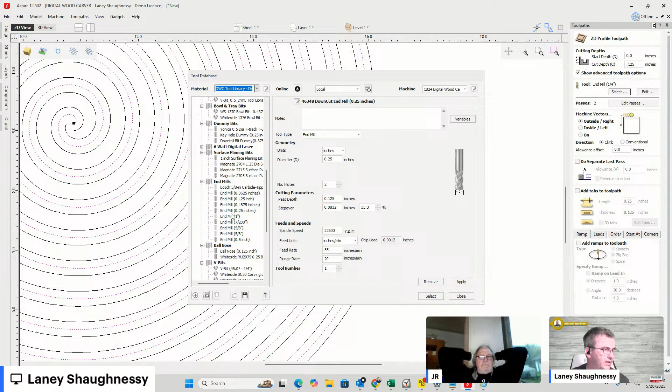Let's go 1/8 of an inch with a 1/4 inch end mill. Let me select my 1/4 inch end mill, the generic one from the new download I just did. So, 1/4 inch end mill on the line. Calculate. Preview the visible tool path.

Hold on, do you want to do a side view? You want me to cut it in half so you can see the side view? Yeah, right, hold on a second. Let me do this. Bear with me, hold on a minute.

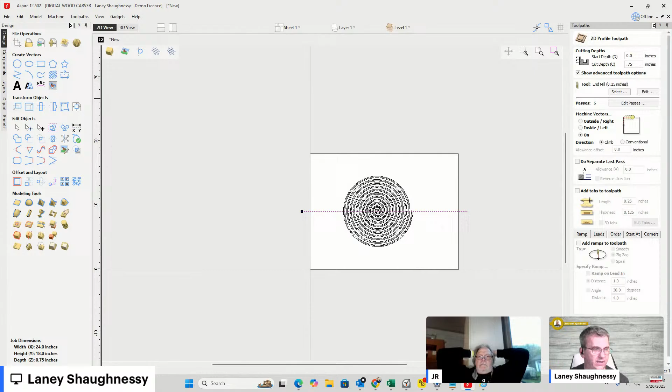Profile cut, 0.75, 1/4 inch end mill on the line. Calculate. Preview the visible tool path. Delete that. All right, so it only gives us basically a flat spiral. If you want it to be rounded at the bottom, use a ball nose bit.

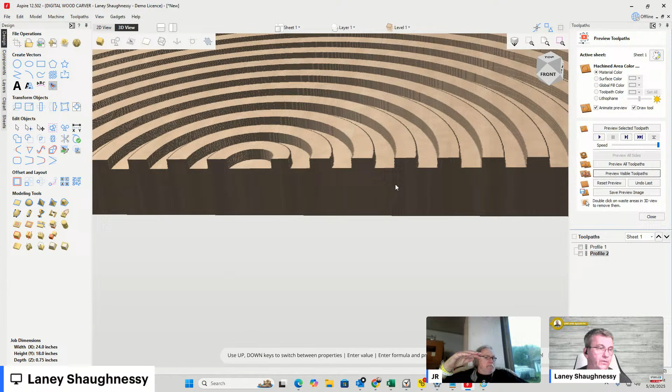No, I'm looking for the Z height—from the top to the bottom. Say my piece is 4 inches. Well, that Z height is based on the depth that I cut. I cut it 1/8 of an inch deep, right here, this one. So my cut depth, that's from the top to the bottom—it's an 1/8 inch deep.

The spiral gadget is only basically making a flat, one-depth cutout. Are you thinking like a tapered screw type of thing? Because I know you were dealing with tapered screws and all that stuff. No, this is just a straight profile in your pocket cut. So it's not going down as you go.

One of the things, JR, for that and everything, I believe, was it last week's class we talked about G code? Were you around last week, JR? Yeah, I don't know if you were around.

But let me go here really quickly. Bear with me. It's in Documents, Planet CNC Master, Shortcuts. Pick a shortcut, it doesn't matter at this point. Run that, click yes.

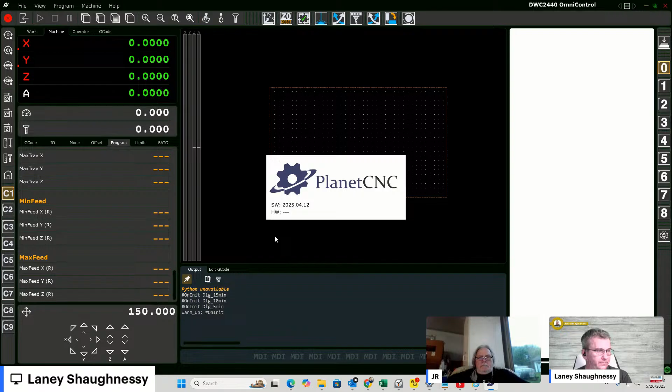In the event of, let me do this really quickly. Help... oh, not that one. Sorry, come on dude, close that. Help, G code, let's go to G code.

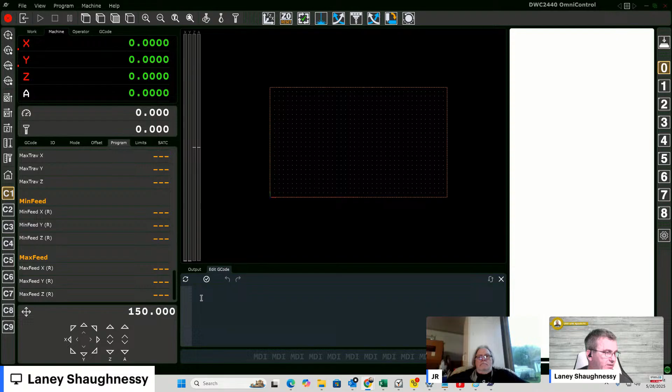And spiral. We could do a quadratic spline, but let's just do this one for right now. Copy. All right, so I'm just going to right now get me started, just paste this right here and everything, and let me turn this up on its side.

All right, now so let me tilt this a little bit. I don't want the bottom half, so let me get rid of all that. There we go, I just only need one spiral.

JR, as far as the taper and everything, currently right now, this particular wraparound, let me stand it straight up. Give me just a second. This particular wraparound is going from my base of 0,0, X,Y,Z - 0 is in the bottom center, right? And it's stepping over 30 millimeters.

Now I'm in millimeters right now. Just quickly, that's the example, but it's stepping over 30 millimeters, and then from there it's stepping up a certain amount. So this blue right here.

So if I highlight this line, you'll see the red. It's stepping up, it's going to 60, and it's saying hey, from 0, go up 60 millimeters and wrap around twice - that's P2, right, so it wraps around twice. And then it goes up another 60 millimeters, to 120, and it wraps around twice again, 1, 2. And then it goes to 165 - it doesn't quite make that full second wrap, but it wraps around twice again, 1, 2, right?

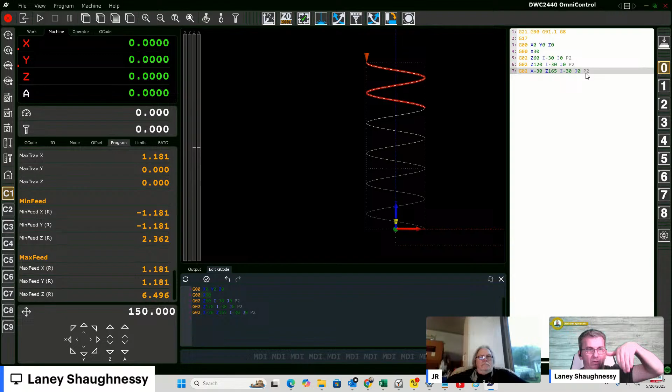And so that wrap, P2, however many times you're spiraling around - if I change this number, just as an example, and then we'll start talking about the taper - but if I change this number in the edit, let's say I change it and I want it to wrap around 10 times in that distance. And so when I refresh that, now it wraps around 10 times in that distance, right?

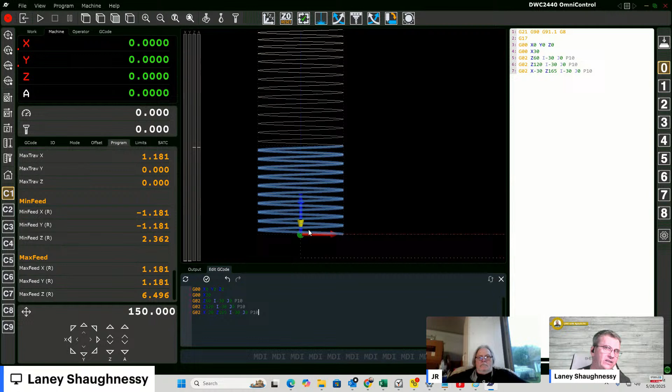So it's spiraling around, and in the event of this being a threading tool path, a normal thread, a straight thread, right - well if I was doing a tapered thread, which is kind of a unique thing in itself, I really never in my life have seen one, so I'm not familiar with it. But what you would do is you would change the center point, and how far it's stepping over, right?

So from here, when it leaves this second line, let me get up here and select it up here. When it's here, it's still over this far, right? And so if I came over here and I said to step over - let's say start at X0, right? So I'll edit this to X0 so it doesn't step over. And then in the next line, I tell it I want to use 0.30.

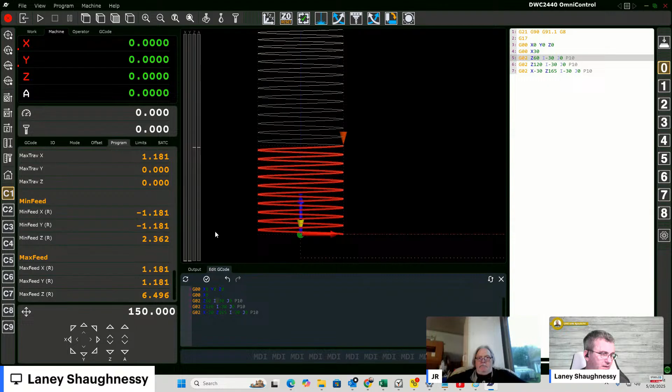I want to use 30 as I need to go. This is going to be a little bit different, so it might have to give me a second. It steps over from where it was. If I go -30, it's going to come back over here, and that might be acceptable.

So let me rephrase that. No, okay, so that's not going to happen. So give me a minute. I need to go to X0, and then...

Here I need to go up. I need to step over to X30, Z60. Does that do it for me? No, hold on a minute. I got to get on the right line. X0. I should do it backwards, but X0...

X0, G02... X30. Oh, let me get a space in there. X30. And then, what does that do for me?

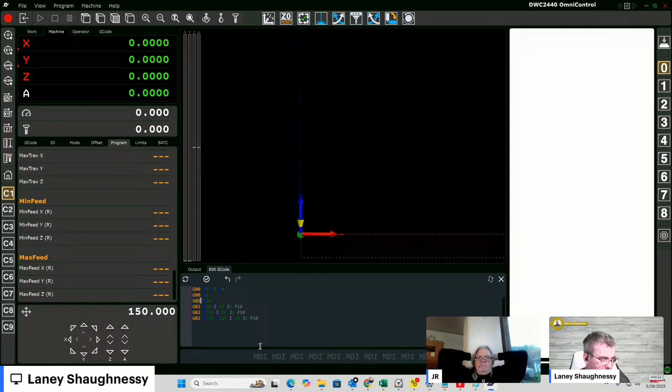I don't think that's going to let me do it that way, JR. Give me a second. No, it's not going to let me.

I have to find out what the rotation point is to rotate down to a cone. I'll have to find that out and write the numbers based on that, Jared. It'll be something I can work with you on, or I can show you guys next week. But it's not something I can think of right now, I got to wrap my head around it. Like I said, it's G-code, but it's got to taper and it's got to rotate. That 60 degree, that negative 30, it's rotating around that center, but constantly the diameter is getting smaller and smaller all the way to 0. So I got to figure out that math, what each line of G-code is so it gets smaller and smaller.

That's going to be the only way you do it. There's no tool path, there's no spiral gadget, there's nothing that's going to give you that appeal. You might be able to do a cone in Aspire as a 3D model and create that inner tool path, and that would do it, but that's about it.

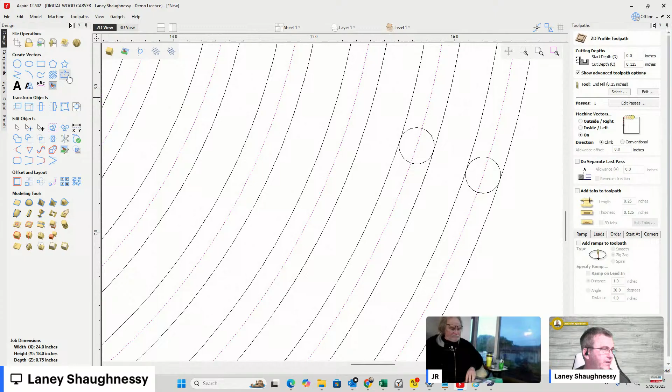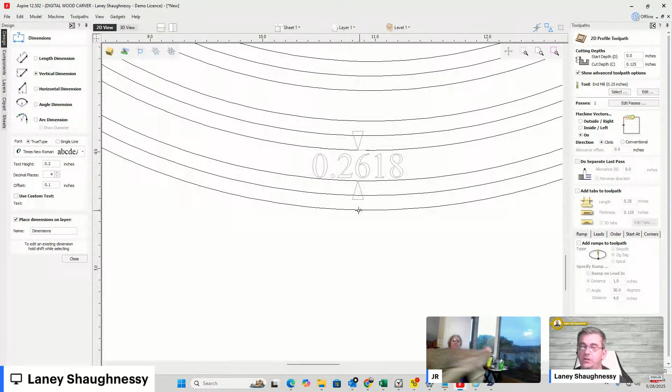Is there any way to calculate how big the offset needs to be to get the wall a quarter of an inch? Sure. So let's look at the math here. Let me take a measurement. Let's do it down here at the bottom where we're straight up and down, kind of center here. If I have a vertical measurement from here to here, that's 0.2618 inches, right? Let's verify, let's see how close we are to being the same, so it's a consistent number. 0.2618 - now that's using a 1/4 inch bit cutting right on the line. It's automatically going to give you that based on this 11 times around Archimedes spiral, it's going to give you that 0.2618 inches of space.

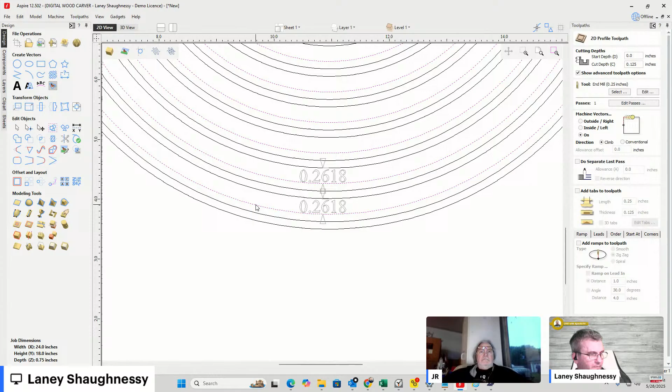Now let's do the math. We need to get down to 0.25, we need to lose 0.0118, and we need to divide that by 2. That's how far the offset is going to be, because it's offsetting on each line. So if I come over here to the offset, let me get rid of these offsets real quick. If I come in here and offset this, 1/8 of an inch gave me that, but now I need to add half of that 0.0118. So if I come in here and say 0.0118 divided by 2 equals, and then I add that to that 1/8 of an inch, and then I offset that, where math should take me.

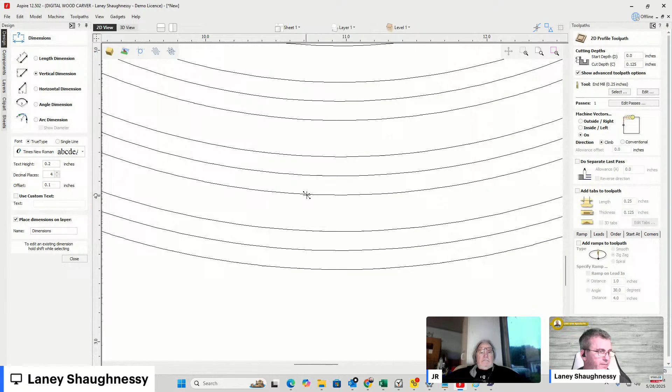If I measure, let me find my center line here, from here to here, we should be at 1/4 of an inch, right? That would be your wall thickness. So Kurt, again, I hope that helps you out, I hope that answers your question.

Okay, alright, and then of course close off the ends, do it as a pocket cut, right? So that way the router bit comes in and cuts against this wall and against that wall over here, clears that area out, and that leaves you with your 1/4-inch wall in between the two parts, right?

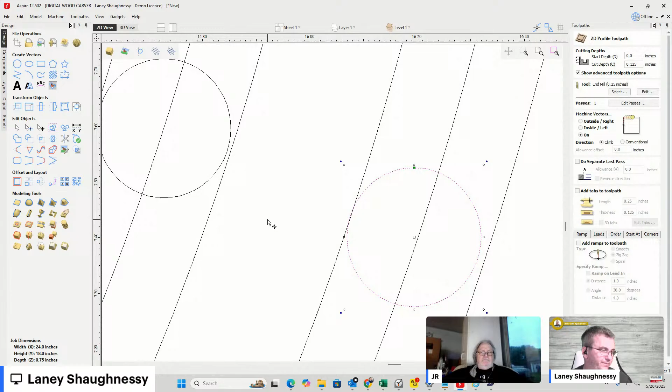Righto, okay, alright. Now let's step up our game a little bit - 1970, 1980 square body truck on a flag. So first thing I'm going to do is change my job size. I'm going to go 38 by 20 and 5/16, 0.3125, 3/4 inches thick. I'm going to import a vector, and I'm going to import that from my E drive. Let me find my E drive.

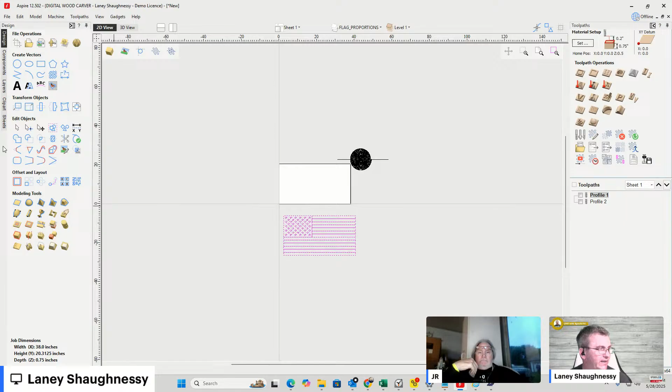PMNOP master files, updated master files, 2440 is fine, VCarve cutting samples, US flag, DXF is fine. We'll import that in. All right, let's get rid of the Betsy Ross flag here. We're going to take this flag and center it on the board. Let's get the spiral. Let's move the spiral over here.

All right, on this flag, we're going to select every other stripe, and we're going to move that to its own layer, or we're going to delete them, one of the two, because we only carved the white stripes. So let's get rid of the red stripes. Every other stripe, starting here and ending there. I'm just going to hit delete to get rid of those, and then I'm going to group together these white stripes. Let's just go group. G for group also.

All right, now let's go online. Google's our best friend when we're looking for this kind of stuff. We are doing a 1970 and 1980 GM square body truck. So let's do a 1970 GM square body truck vector. Let's go images, and I don't know if we want a jacked up truck, standard body, old time, whatever the case may be, right? It's a 1969, so that falls a year short of what we're looking at.

For right now, let's just go with here's a 1970. Let's just go with this. K10. We can go with that one, or let me see what all we got here. Is Chevy GM? Yeah. All right. Just want to make sure. Square body truck.

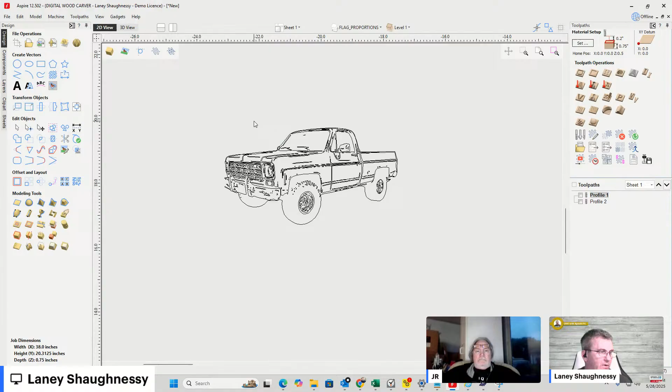Turn the fading off. I only want, oh man, I'm sorry. Well, let's do that again. I only want that. Turn the noise filter up, preview, apply, close. Get rid of that. Okay, now the bumper got cut off. It's a bad picture. It's not the greatest in the whole wide world, but it will carve for these purposes.

Okay, so now you're going to bring it over to your flag. You're going to size it up to however you want to position it. Okay, so let me come in here and let's say I want this on the flag right here. All right, now here's the key to it all. We want to do an offset. We want to create a boundary to trim the stripes to.

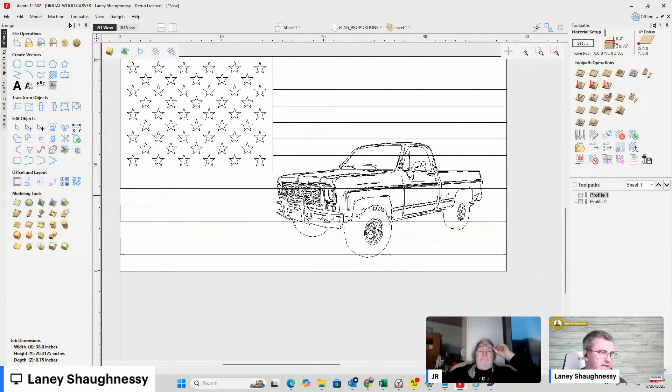So on the truck here, I'm going to ungroup it for the moment, and I'm only going to select the outside vector, right? And in this case, the outside vector kind of stops, and it really doesn't go all the way around. So I'm actually going to select it all because, again, it's a bad photo. I'm sure if you pay for it, the one that they actually give you is better, right? We just snagged this for just a minute, but I'm going to offset this outward, and I'm going to go 1/8 of an inch. I like 1/8 of an inch offset.

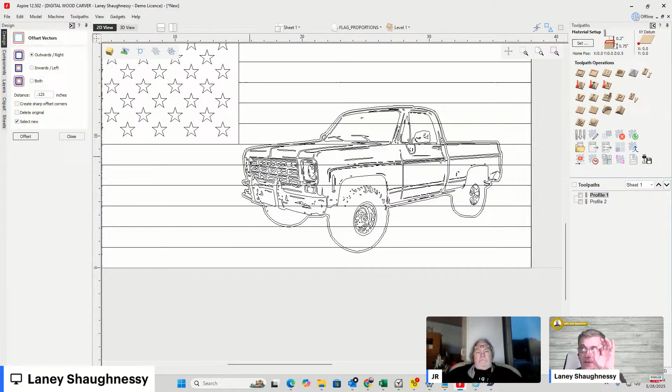And on that offset, now all I care about is the outside line, nothing else. So I'm going to come in here. I'm going to hold down my shift key and turn off that outside line and hit delete to get rid of all those other offsets, right? I don't want them. I just want that outside line. Now I have a boundary to trim to.

So I'm going to select my stripes first, my boundary last, and I'm going to use the trim tool to clear inside that boundary, and it's going to redraw the stripes around that boundary, right? Clear them out. Now that outside boundary that I used, delete it, don't need it no more. It served its purpose. So now I have a place here on the flag to carve. So I'm ready on this.

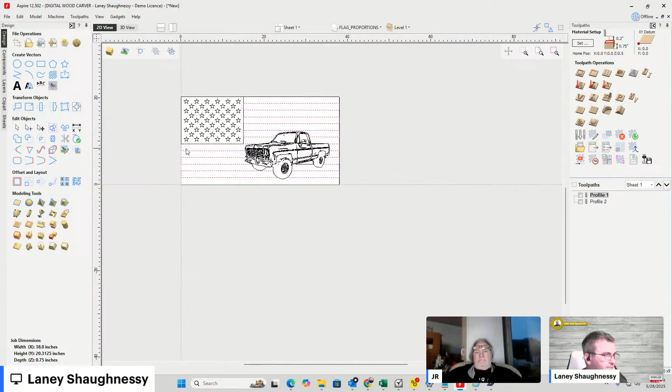Now there's one other thing I want to do on the stripes. I'm not going to do a border around my board. I'm going to have the stripes run all the way to the edge. So I'm going to go into node editing. And I'm going to take these outside nodes here, pull them out, and type in 0.125 and hit enter. I just want to go out 1/8 of an inch so my bit goes just past the line to clean up, give me a nice clean edge there.

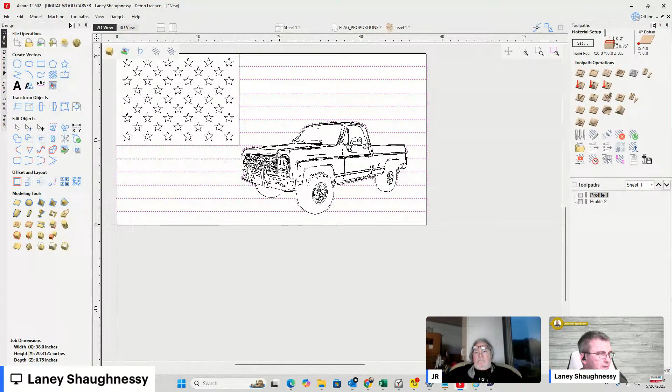Right? Same thing over here, the left side. I'm going to pull them out, and type in 0.125 and hit enter. Just give me that 1/8 of an inch. That's it. All right, now I'm ready for tool pathing. So on the tool path, I'll go ahead and select all the stripes again. All the stripes. There's no stripe segments missing or anything like that. I'm going to hit G to group them back together just for shits and giggles. All right, here we go.

VCarve toolpath. I'm going to go 1/8 of an inch deep. I love 1/8 of an inch deep. I'm going to use a 60-degree V-bit on this. And I'm also going to use a 1/4 inch end mill, and I'm going to go with a raster back and forth like a printer. I'm going to call this stripes, S-T-R-I-P-E-S, and calculate that. That's going to give me my stripes here, and you'll notice when the stripes carve, it leaves that nice void in there for the truck to carve in, right?

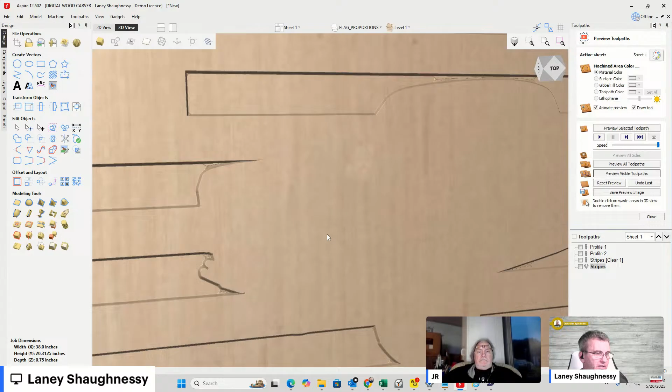All right, my next tool path is going to be the stars. I'm going to select the stars. That's going to be a V-carve toolpath. Now, this is rinse and repeat, guys and girls. I don't care what that emblem is. It could be a truck. It could be a dog. It could be a dolphin. It's the same steps. Create your offset, trim your stripes. It's the same. It never changes, right?

Now, if you have Aspire, you can take it from here and you can do waves and all that kind of stuff. But no flat depth on the stars, no clearance tool. Just calculate the stars. All right, let's preview that visible toolpath. All right, so now we're at this point right here.

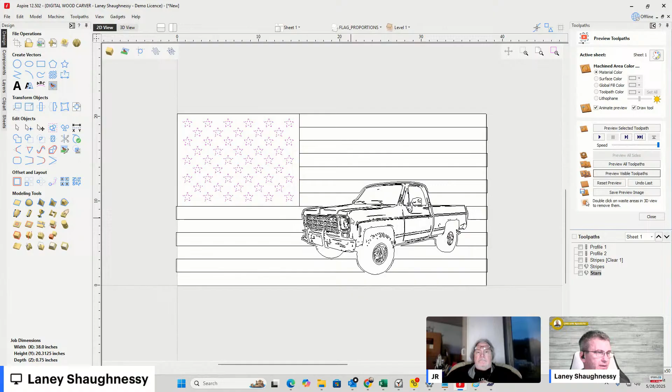So the last toolpath is going to be the truck. So we're going to select the truck vectors, all of them, except, make sure none of the stripes are selected. That's also going to be a V-carve toolpath. Now this one, I'm going to set a flat depth again. I'm going to go the same depth as the stripes, 1/8 of an inch. I'll use a smaller bit to get into any of the nooks and crannies.

The 1/4 inch bit I'll just leave out, but I will use an 1/8 inch end mill on this one, along with my 60-degree V-bit. This will be the emblem, whatever it is. We'll just call it an emblem, and calculate. All right, preview that visible toolpath.

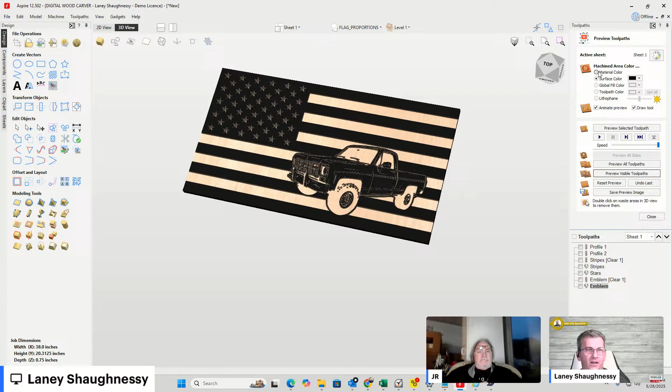All right, so now when I add some color to this, we'll just do a straight black on that. Not like that, that's the wrong color. That's the surface color. That's new for version 12.5: they now have a surface color. Like if you're carving on boards that have a different color in the middle than the surface, you can now simulate that in the carve. I don't want a surface color of black. I want a global fill of black.

There we go. That's what I want. So just so you understand what just happened there, imagine I had a board, that piece of melamine, right? And the surface color was white, let's say, and then the middle color was tan. I can simulate that now in 12.5, because now I have a surface color versus a global fill color, right?

And on the global fill, I can still change the material. Like in the middle right here, I could change that to oak, and I'd have that oak look under that melamine top, that kind of thing, right? Anyway, so that's new with 12.5. That's one of the new features. All right, let's get off of that global fill so we can see.

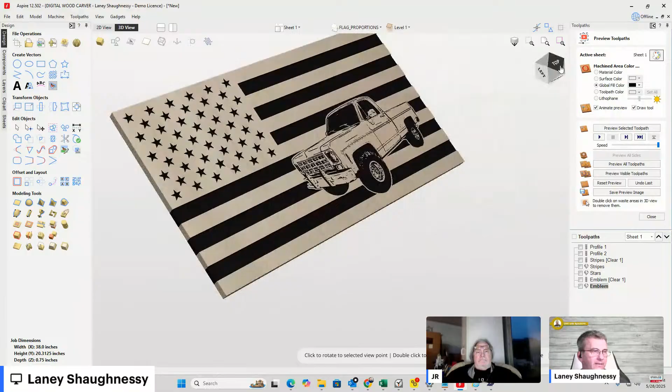And so now we have a square body Chevy on a flag, right? And literally, it's 3 toolpaths. You import your vector. Go buy a vector off of Etsy. They got some nice vectors there for $2 or $3. Get you a really nice one. Bring it in, offset the outside line. I love 1/8 of an inch offset. Use that offset to clear around the stripes.

And then once that's done, your stripes toolpath, your star toolpath, and your emblem toolpath. It never changes. So you can watch this video, make notes on those 3 things, and it's rinse and repeat. Now, of course, if this was Aspire, which I am in Aspire, and you were making this into a model, then you would select your vectors and turn them into a model, right? Except the truck would still be a V-carve in there. But that is a square body truck on a flag.

Okie dokie. All right, let's see what we have here. If and when Vectric adds parametric, we already went through that. Yes, that would be a cool thing. I'm using a channel to glue an LED rope. All right, nice. So a channel for LED rope, that's what your spiral is for. All right, Roger Brown, perfect. Thank you, Roger. I think you were the one that asked about the square body truck.

Yes, it was quick and dirty, but if you need the flag, I'll give you all the flag. Hold on, let's do that. Let's be nice today. So let's go here to my E drive. Go down to the P's, Planet CNC, master files, updated master files. We'll just go into one of these. 60 degree. All right, we'll go the SVG and we're going to copy these. We will go to downloads, create a new folder, call it US flag vectors. Paste those two files there.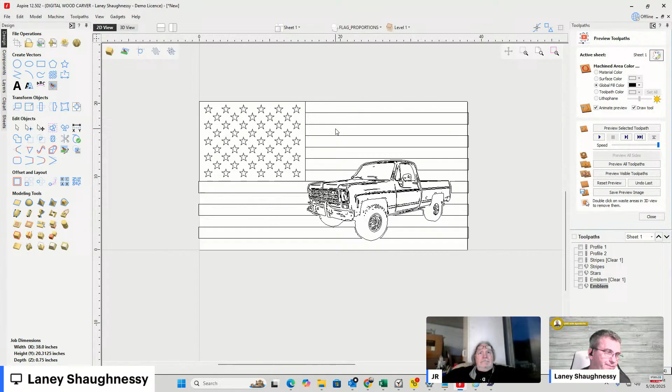You import that in, and then from here, I can size this down to any size flag that I want, but don't stretch your flag. Scale it. Don't stretch it. Oh, all right. Okay.

There you go, man. All kinds of good stuff happening tonight. Okay, what's next, ladies and gentlemen? Anything? Anybody else? Anybody else have a question or have something that they struggle with, that they run into, they need some help with? While you're thinking and typing it in, let's talk a little bit more about 12.5.

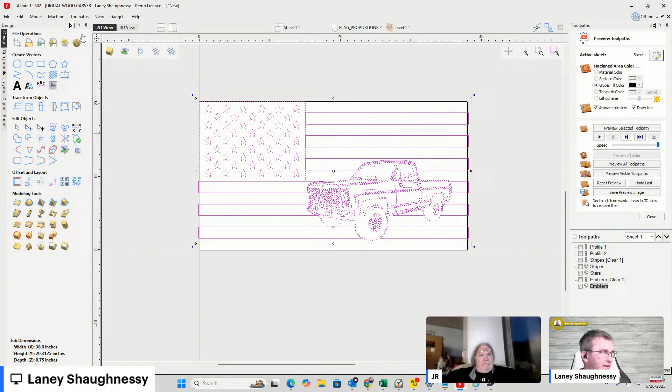So in 12.5, in the 3D view, we can do a lot more things now. I'm going to reset this back to a blank 3D view, and I'm going to turn on the vectors, and let's type some text as well. Let's type in Chevy. All right. So now in the 3D view, I can manipulate text just like I would in the 2D view. I can rotate it. I can do whatever. I can change fonts. I can do all that.

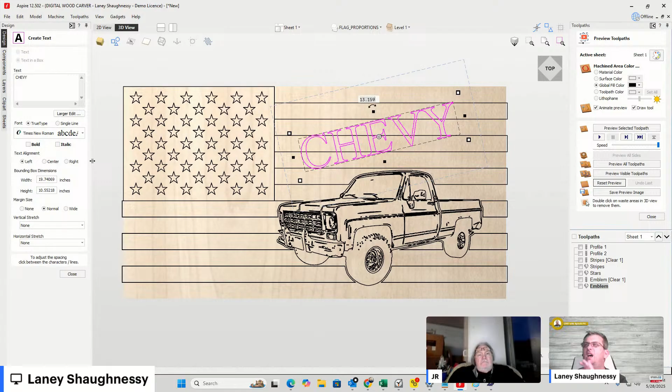So a lot of the enhancements that 12.5 has come out with is being able to do a lot of work in the 3D view. If I right click, let me get out of the text box for a minute. If I right click in the 3D view, let me see here. Bear with me. I got to turn them on first. Toggle on and off guidelines. They're on now. That's it. Yeah.

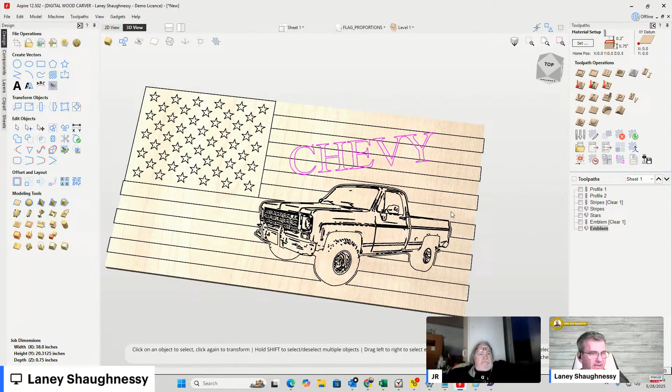Okay. So, oops, that was not what I wanted to do. Oh, what am I trying to do here? Let me come in here. View guidelines. Guides visible. I should watch the video before I try to show this stuff. But let me see if I can get the guideline menu to pop up. I'm in the preview tool. I'm an idiot. Get out of the preview tool. There we go. Now I can work. When you got the preview tool open you can't do nothing because it thinks you're previewing a toolpath. So close that tool. All right.

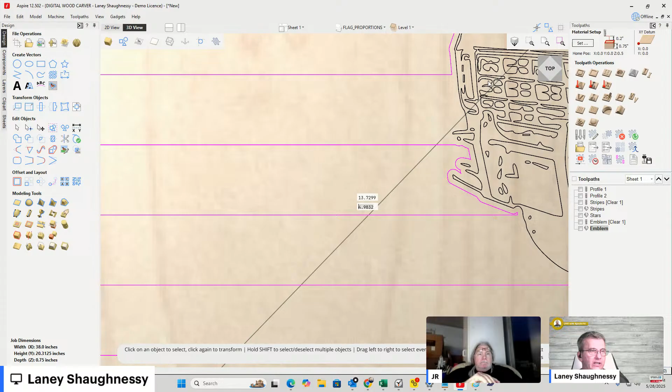I was wondering why my menus weren't popping up, but now in the menus, guidelines, right? So we can insert a horizontal, a vertical, and a diagonal guideline now in the 3D view. So an angle guideline, and then in here, you can change the length and angle, or the position of it. Here's the angle, 45 degrees. So you can change that angle of the guideline. You can rotate it here as well, but you can also type in the angle here.

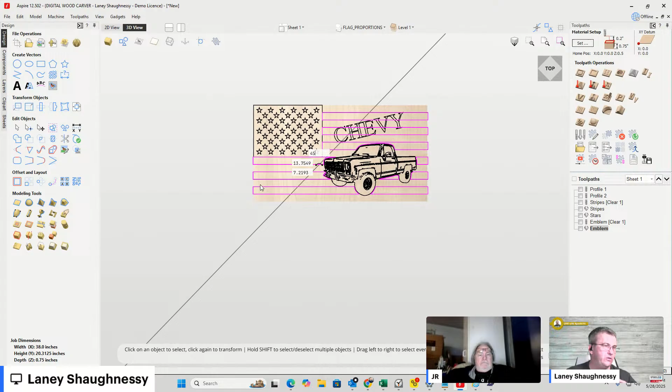So you can now work with all the layout stuff, right? All the layout stuff for guidelines, working with text and vectors, your selection tools, all that stuff now can be done in the 3D view. That's the big thing. You don't have to keep switching back and forth from 2D to 3D view. You can do everything in the 3D view if you wanted to. So they made it so much more dynamic.

The active layer selection and select: in the select tool, you can now select parts. Like if you have individual parts laid out, just like you select open vectors or closed vectors or duplicates, you can now select parts. Like if you have a group of things that's a part, however you want to classify it, you can select that so you're not trying to select all the little pieces of that part. Yes, Roger S, I can. So that's one of the new tools.

Another new tool is the laser, just like the sketch carve over here, right? Sketch carving. They've improved the sketch carving toolpath, by the way. Not sure what they did to improve it, but they have. But now there's laser engraving sketch carving. So you can laser engrave on a model or a picture or a vector and things like that. So pretty cool stuff.

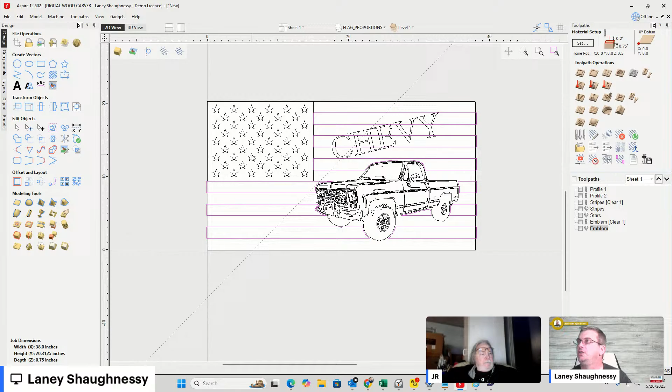Now Roger S asked about doing a chamfer on a 3/4 inch thick board. Well, let's take a look at that from a side view for a minute. Let's pretend that this is my 3/4 inch thick board, right? And we know that if we do our 45-degree angle, let's go 45. Let me get to it. Come on, there we go. Space bar. Right, so this right here, 45-degree angle, that chamfer.

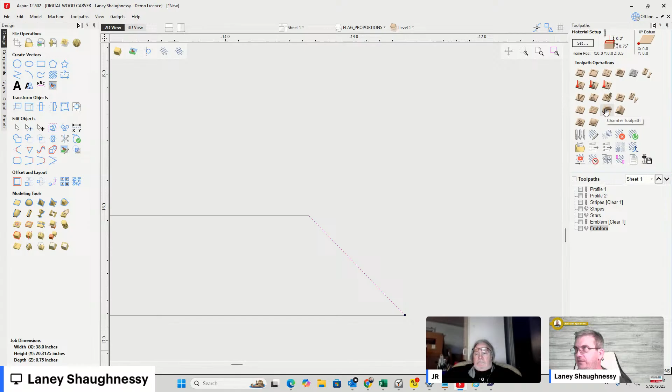Now there's two ways we can do that on a 3/4 inch board. Number one, we can use the chamfer toolpath and a 90-degree V-bit. Okay, so on the 90-degree V-bit, let's take this flag and move that up there. And let's get rid of this guideline. Let's draw my 3/4 inch board.

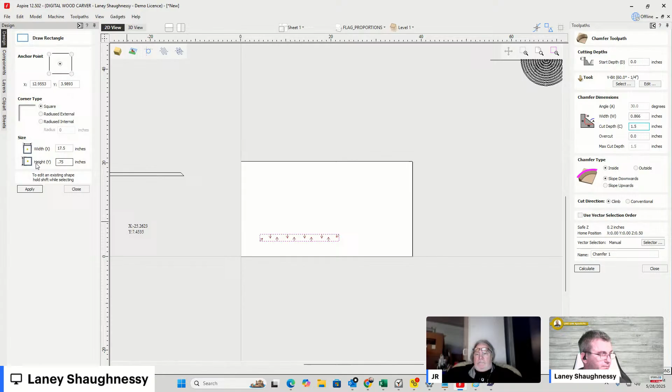Okay. Now, on the board, let's say that I'm actually cutting this part out, and on the end, I need to do this chamfer, right? There's the old school method where we draw lines based on the cut that's going to happen and the pass depth, or we use the chamfer toolpath, the new school method. All right, old school method. Let's go back and look at this here.

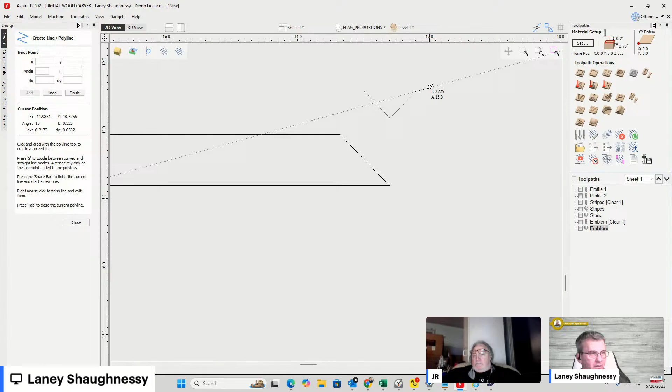And imagine, if you will, use your imagination, that I've got a 90-degree V-bit. So let me get a 90-degree V-bit going on here. Okay. Now, that V-bit, let's say I'm starting at 0, right at the top of my board. Now, this bit is going to come down and it's going to cut. And it needs to go down a certain depth and cut. And we're going to do it in 3 passes.

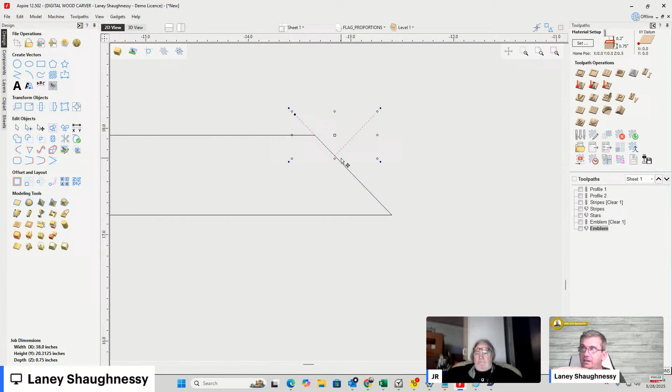We're going to do a 1/4 of an inch, 3 step overs, should I say, not 3 passes, 3 step overs. We're going to step over, and down a 1/4 of an inch cut, the next 1/4 of an inch cut, that's a 1/2 inch, and then the next 1/4 of an inch cut, 3/4, right? So if I come in here with a guideline, and I make a guideline, 2 of them, 3 of them, we'll do 3 of them, a 1/4 inch apart, right, for here.

So my bit is going to be cutting down to this first pass, right, a 1/4 inch deep. Now, what I need to know is the step over, because I'm going to be doing a profile cut on the line for the first cut, 1/4 inch deep. That's going to make this first cut. But now, let's hold down the control key and make a copy. Now my next bit is going to be coming from 0. It's got to come down to this pass, and it's got to step over this far, right? And that step over from there to there is going to represent my next line on my board.

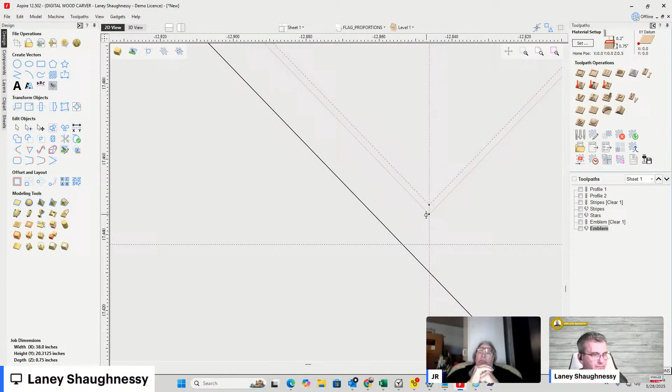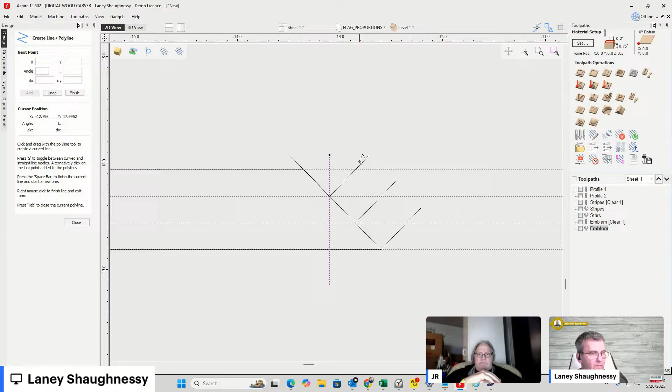And then my third line, hold down the control key, come down and kiss down here, grab it, kiss it right there. Let me make sure that all my bits are lined up with my board. There and there. All right, now the center of these 3 lines, if I come in here and draw a line, and I draw a line, if I were to measure the distance between those lines horizontally from center to center, it's a 1/4 of an inch. Center to center, 1/4 of an inch, right?

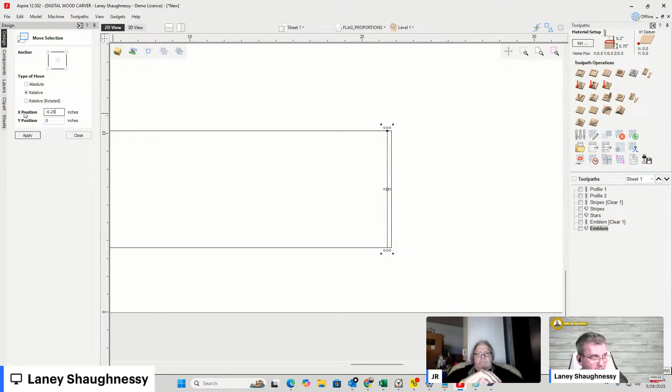So if this is my board, I'm going to draw a line. I'm going to hit copy and paste. And I'm going to move that pasted copy negative 1/4 of an inch to the left. Let's try that again. Negative 1/4 of an inch to the left. And then copy and paste. And then move that line negative 0.25. All right, let me make sure here, I need one more line. So that's my third line right there. So first pass, second pass, third pass.

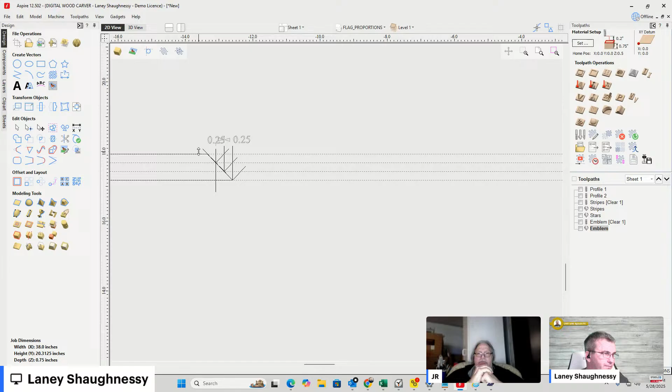Now, of course, if I want to go shallower with the cuts, now this is the manual old school way, right? The chamfer tool takes care of all this stuff. But if I wanted to go an 1/8 of an inch per pass, I always draw the side view. And my guidelines would be separated by an 1/8 of an inch per pass, not a 1/4. And then I would draw a V-bit on that 1/8 inch line, that 1/8 inch line, that 1/8 inch line, and I would measure between the center of those bits, and that tells me what my offset is.

And just so you know, for a 90-degree V-bit, an 1/8 of an inch pass step is an 1/8 of an inch step over, so your lines would be stepping over an 1/8 of an inch. For a 1/4 inch pass step, that's a 1/4 inch step over. For a 3/8, it's a 3/8. So they all match, right? Okay, so I'm doing 3 passes. I'm being aggressive here, 1/4 of an inch, 90-degree V-bit. But I can handle it.

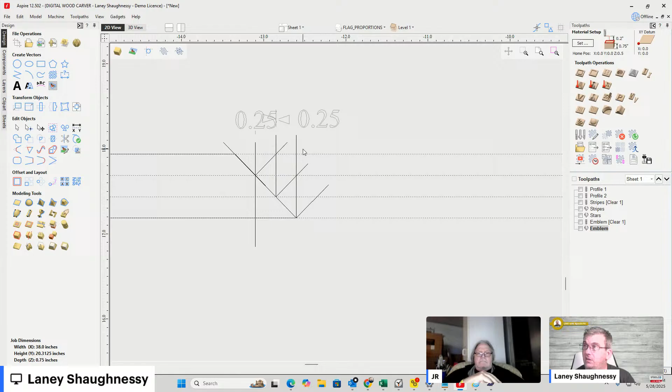Now, one of the things that I may want to do if I'm doing this is bring an end mill in and do a couple of shallow cuts to clear away some waste or whatever, but I'm not going to, right?

So we're going to assume that this is our cuts right here. This first cut is going to be a profile cut. It's going to go 0.25 inches deep, and it's going to use a 90-degree V-bit. Also, ladies and gentlemen, make your lines longer than your board piece.

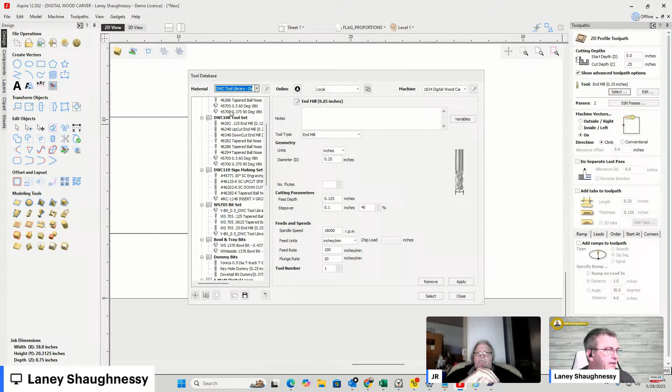Bear with me just a second. 90-degree. Make your lines, allow them to go just past the board a little bit because it's going to get cut out, but allow the bit to go past.

All right, so one more time. We're going to step down a quarter of an inch, 90-degree V-bit on the line. Calculate that toolpath. Preview the visible toolpath. Let's get rid of the color. That's our first pass.

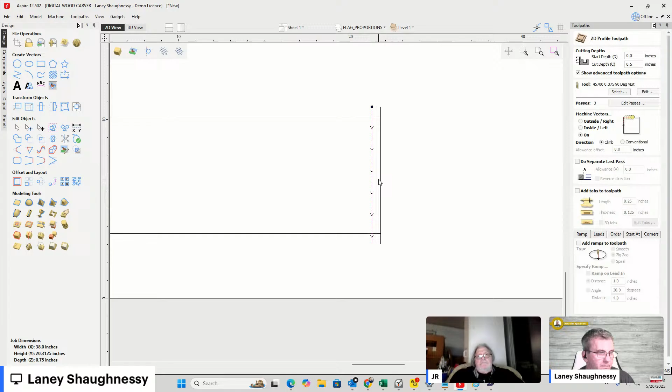Now the second toolpath is going to step down a half inch, 0.5. Now it's taken passes, right? It's not doing it all in one pass, it's not that aggressive, it's doing it in three passes and everything. But we're going to calculate, that was the same line. Let's do that again. Calculate that line. Calculate. All right, so that's going to make that next cut.

Okay, hold on a minute. I've got to base it on, give me a second. Stand by just one moment. I need my bit. Where's the first line? Where's my first line at? Okay, let's do this again.

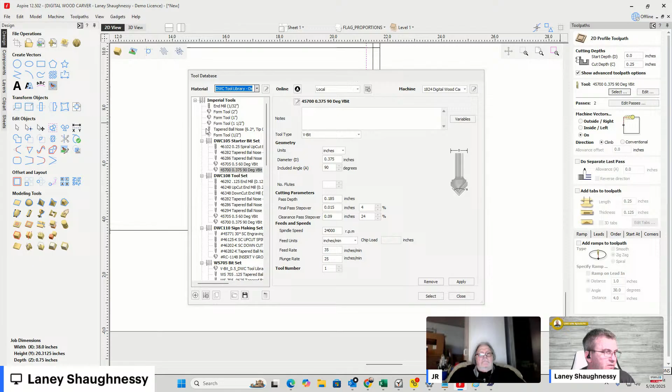One more time. So this one's going to be 0.25, but I need to use my half-inch 90-degree, not my 3/8. Give me just a second. My 3/8 is too skinny, I need my half-inch 90-degree. Calculate. All right, reset that preview. Preview that toolpath. Wonderful.

Now, one more cut. Profile cut, cutting a half inch deep. On the line, we're going to choose the second line. Calculate. Preview the visible toolpath.

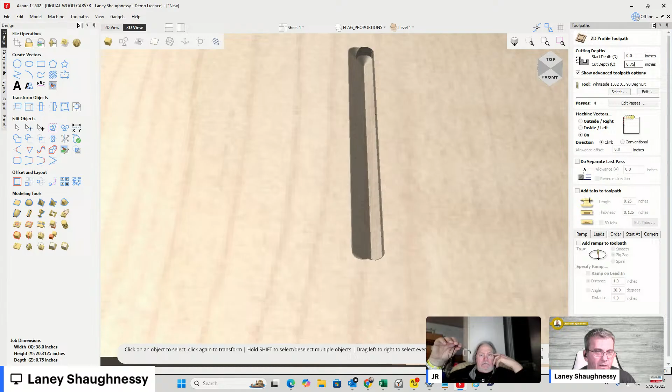Okay, third pass is going to go 3/4 of an inch deep. On the line, select the third line. Calculate. Okay, preview the visible toolpath.

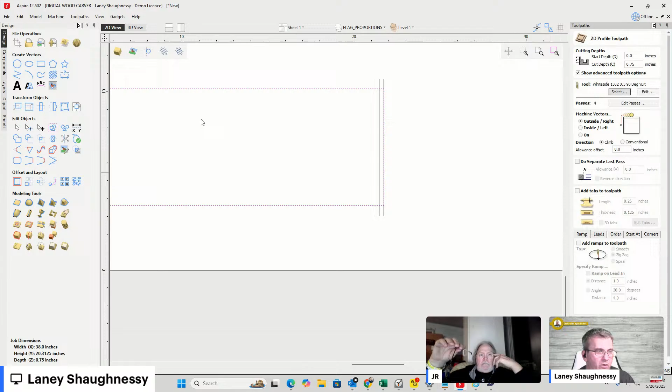Now, when we do the profile cutout, let's say we go here, profile cutout, cutting all the way through the material on the outside of the line with a quarter inch end mill. Calculate. Preview that visible toolpath. Get rid of the waste, and we have that 45-degree cut on the end of the board, right? All right, so that's the old school way.

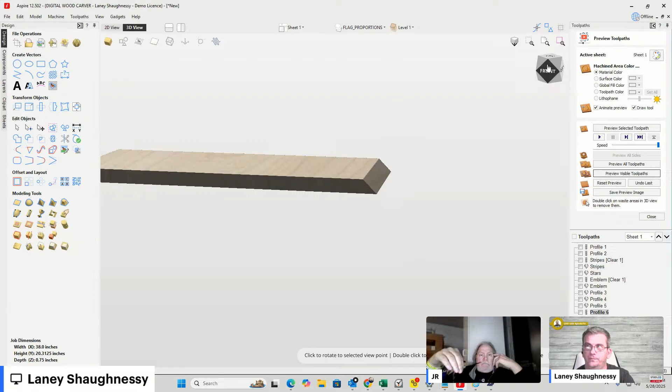Now, Roger, now we have a chamfer toolpath that handles all that for us. So in the chamfer toolpath, all we need is one line, okay? And the line that we need is going to be the one at the end of the board. Now, you see these arrows? As soon as I open up the chamfer toolpath, we have these arrows that shoot out.

The arrowhead points to the deepest part of the cut, right? So the arrowhead is the deepest part of the cut. That's going to tell us how we choose here. First of all, I want to choose a 90-degree bit, and with my 90-degree bit, I am cutting a total depth of 3/4 of an inch.

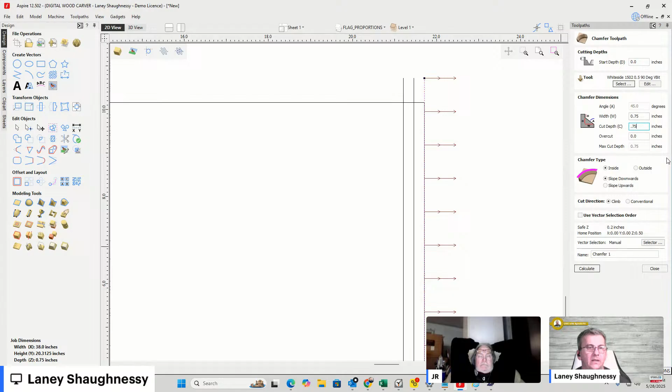All right, notice these lines here. Like I said, the arrow points to the deepest part of the cut. Well, the deepest part of the cut is the end of my board, not out here. So I need to be on, if I'm going to be on the inside of the line, I'm not sloping downward, I might be sloping upward, but no. Yes, that's pointing to the deepest part of the cut, but the shallowest part of the cut is the top of my chamfer, the top of my board. I'm on the wrong line, right?

So I need to be on the outside of the line, and I need to be sloping upward. So this inline, I'm sloping upward to my zero, right? So the deepest part of the cut is where the arrowhead is pointing, that's the 3/4 inch, sloping upward to zero, right? So I need to be on that outside of the line. So I calculate toolpath.

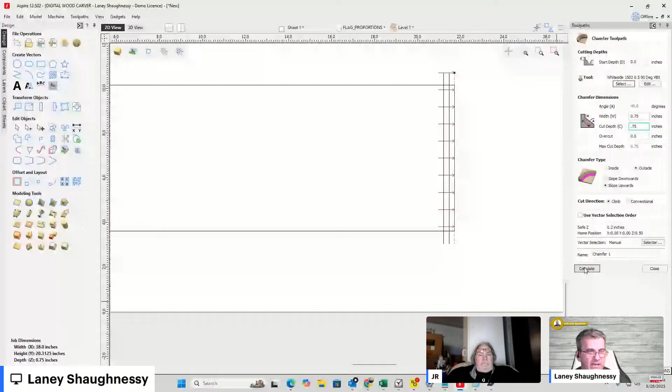And if we preview that toolpath, it creates those same passes. It doesn't do it in one pass, so if we look at that, just so you know, all these passes and everything, it's taking those steps down, right? Those passes and all, but that's my cut.

And then if I did the profile cutout, right, we end up with that same part. Either one, both get you from point A to B. One's old school, one's new school. The chamfer toolpath is the best way to go.

Right, 90-degree bit, cut a 45-degree miter on the end of a board, and or you can call it a 45-degree chamfer, but it's a miter. Whatever, either one. All right, okay.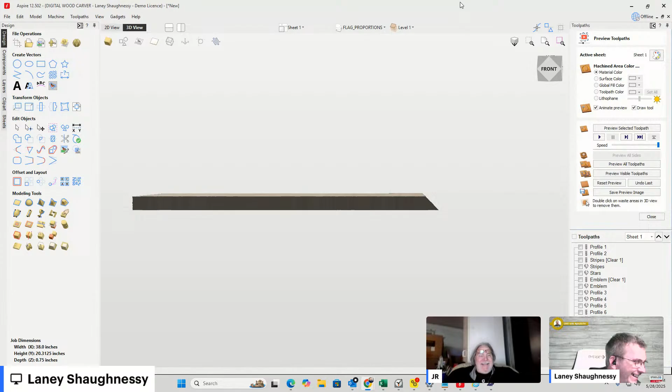Jerry, you got something? You got anything besides, I can't do the conical spiral. Jared's like, dang it, that's the only thing I want to learn right now, and you can't help me there. But I'll write you a sample G code to see if that at least points you in the right direction, and then from there you can kind of go from there.

I'll write you a sample G code that will create that conical thread. Now the only thing you got to think about is the bit itself, the threading bit, right? It doesn't get smaller as it goes down. So it's got to at least be the width of the diameter at the bottom of that threading bit, and then it can get wider as it goes up, but it can't come to a straight point because the bit can't fit if the bit can't fit. That's true. Yeah, all right.

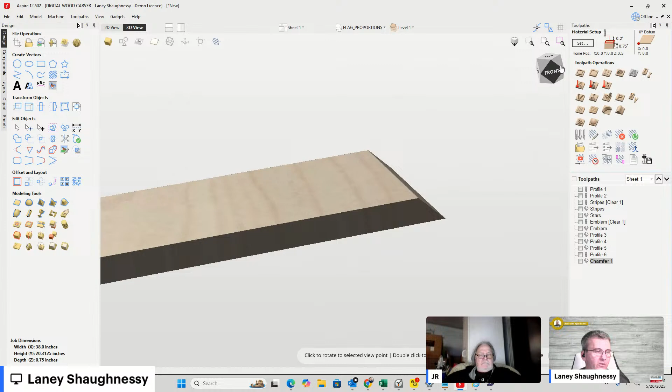What I really wish they would enhance is, I wish they would figure out a way to show undercuts and everything. Ooh, that would be sweet. That would be so nice. It would be nice. Anyhow, all right, I'd love to be able to see, if I'm doing a dovetail cut, I'd love to be able to see that dovetail cut and everything, kind of thing.

All right, let's see what do we have here. Ron Bishop says, what about if you wanted like a 50 or 55 degree chamfer? What type of bit would you use? Well, in the chamfer toolpath, if you're using an angled bit, 90 degrees, 60 degree, 22, 15, that kind of thing, notice how with the 90 degree V bit the angle is blanked out right here. It's grayed out, I can't change the angle, right? That's going to be the angle. How wide and how deep I cut that angle is all based on the bit being used. So if I need to do an odd angle that they don't make a bit for, like a 50 or 55 degree, then the option they give us is to use a ball nose bit.

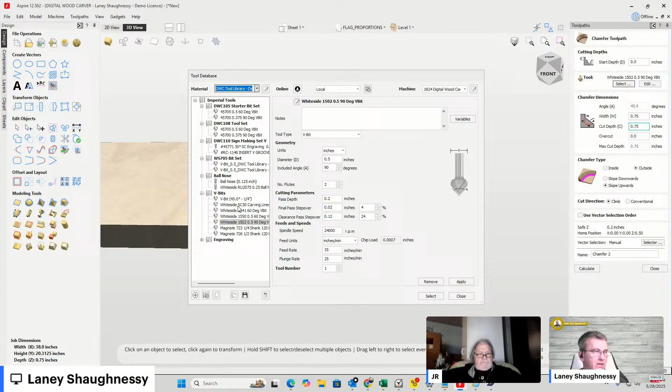So if I come in here, you'll notice that ball nose bits are able to be used in your list as well as in that. So I would use a 1/4 inch ball nose. Now notice something that's not showing up here, which is tapered ball nose bits, right?

That's a no-no, so only ball nose bits, right? So in the case of this, let's say I want a 1/4 inch ball nose bit. Let me add one in here. I don't have one.

0.25 two flute, pass depth, that's good. Step over, now you can change the step over. I like a tight step over. 18,000. 125, 30. All right.

So now that I'm using a ball nose, notice that my angle is no longer grayed out and I can type in a specific angle. Now here's the thing, okay.

Based on my start depth, my bit, my angle, I have two options here. I can change the width, how wide it's cutting out from the line, or its depth. These two numbers are kind of tied together, meaning if I take my depth, and let's say my depth is a 1/2 inch, my width is going to be 0.5959, right? If I'm 3/4 of an inch, my width is going to be 0.8938, right?

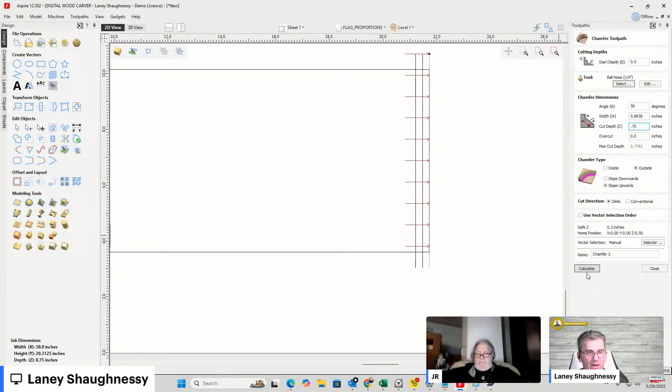Now because of, notice what just happened here. I want you to see that. Let's do that again. Notice right here about cutting through the material. Now I set the cut depth to 0.75, but to create the end of the angle, the bit tip is round. It's got to go past the round tip to create that flat point of the angle. Otherwise it would ramp up like a radius, right? It needs to be flat all the way to the bottom of the angle.

So the bit has to go past that 3/4. So it's saying, hey, you're going to cut 0.779 on your 3/4 inch board, have a waste board in there, blah blah blah, because we're cutting 29 thousandths more than our 3/4, right? So.

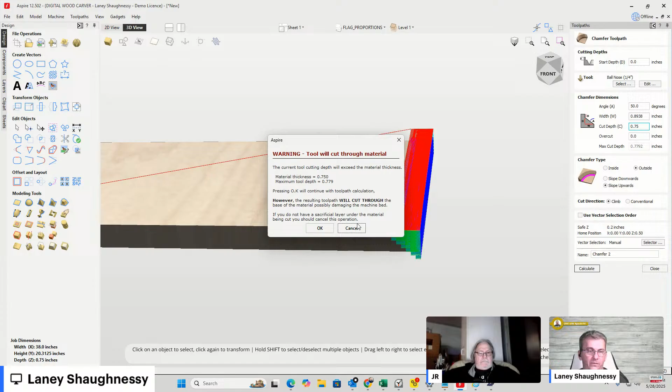That's that. Now what happens here is look at this cut, right? My step over is too big for the ball nose bit. So the step over is that 8% step over. It's great for models and all, but not for this chamfer and everything. So on my step over on this ball nose, I need to really have a pretty tight step over and everything, so that when the cut occurs...

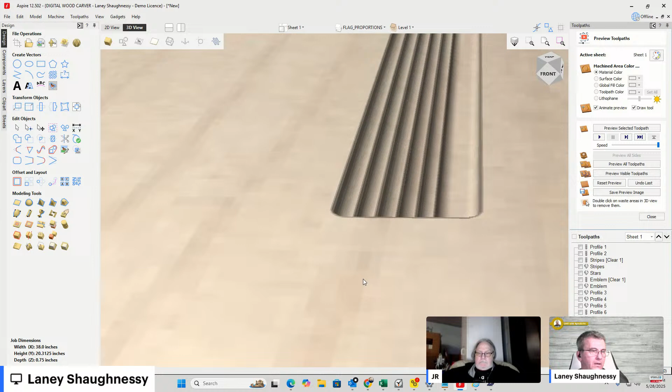Oops, come on, goofball. Oh, Lord have mercy. Kicking my butt here. Overcut. Give me a second here.

I don't want to overcut by that much. Let's see, what's half of my ball? It's a 1/4 inch, 1/8 inch. 0.125.

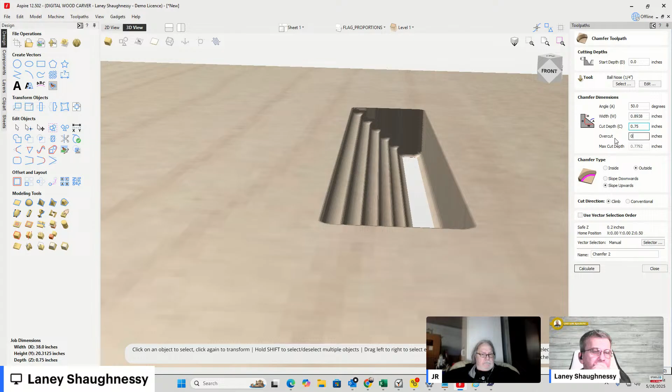Hold on a second, it's not the overcut, no overcut. Oh, it's my step over. Pass depth, I'm an idiot. With the ball nose bit, it needs shallow passes. It's got to step over and, tight step over, shallow passes to create that cut.

I'm going 1/8 of an inch per pass, so it's creating that stair step. So I'm going to step over, I don't know, just pick a number. I'm going to go a 32nd just for right now, and with a 2% step over. This way, with the cut and everything, it'll create that smoother chamfer.

Okay, and then we do our profile cutout, preview the visible toolpath, that kind of deal, right? So if you have a weird angle, it's a ball nose bit, but the ball nose bit has to have a small pass step so it gets that nice, trying to get the smooth chamfer. You can even see it a 32nd inch step over.

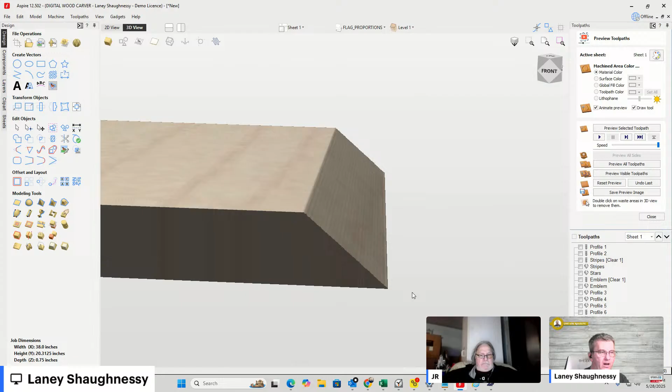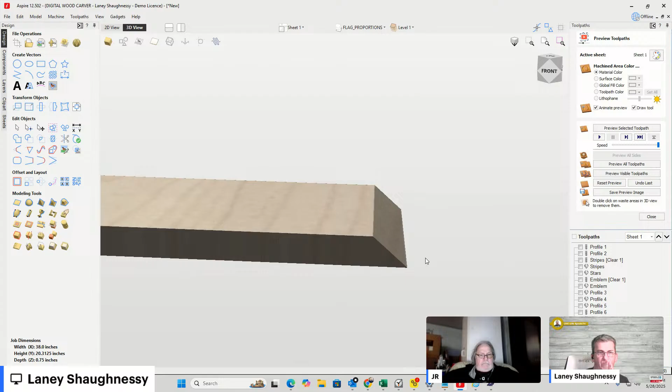Once I dig into all the enhancements of 12.5, there's a lot of nice little stuff that's going on with group tool path and sheets, there's some new enhancements with sheets and group tool path and things. So I'm looking forward to learning each and every one of them. I just literally downloaded this, like I said, about 2 minutes before the class. I only watched maybe like 5 minutes of Becky's video, and I was running out of time to get the class started, so I didn't get a chance to really look at a lot of stuff.

But everything, as I was kind of zipping through, a lot of it is just being able to work in that 3D environment as well as a 2D. With fonts now, your text, with guidelines, the way you select things, your trimming tools, all that stuff. And the trimming tools, now you can trim in the 3D view as well. When you're in the 3D view and you're looking at your

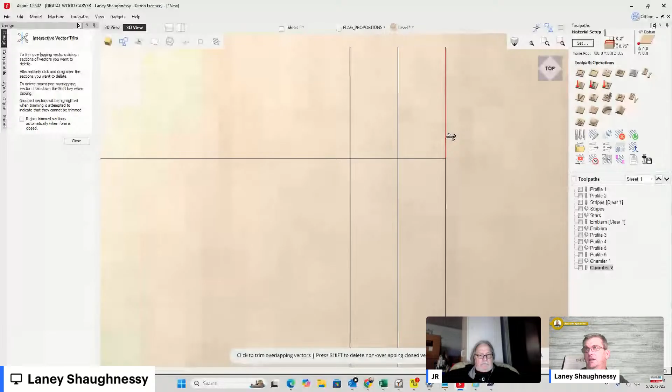vectors and stuff, you can now come in and trim, and notice when you go to highlight, or when you move over, it shows you the line. It turns the line red. It shows you what you're trimming to, right? And it shows you where it's going to dead end and all that stuff. So now you can trim in there. It's not full yet, but they're making it more and more dynamic in this 3D view. So that's some of the new things. All right, let's see here.

JR says, spoil board setup for my 4848. Thinking that I'll make the size 49.75 by 50 1/4. My machine's home position will be set at 0, 0. My work position will be set to 0.25 and 50. Yeah, and so your machine can move 51 by 51, right? It can physically move to that. So imagine if you have a 2-inch end mill, the center of the bit can go 51 to 51, right? You've got an inch overhang all the way around on that bit.

So you could technically go out 52, 52 on that, but your tool path will be set up for 51, 51, but it can also mill that extra inch. So the numbers you have, 49 3/4 by 50 1/4 is fine, no problem there. Yeah, so starting to gel. Just think about your machine, your operating movement is 51 by 51, right? It can cut edge to edge on a 48 by 48 board, but it can travel 51 by 51. That's kind of its limits. So if you went 50 1/4 or even 50 1/2, as long as you're under 51, you're good.